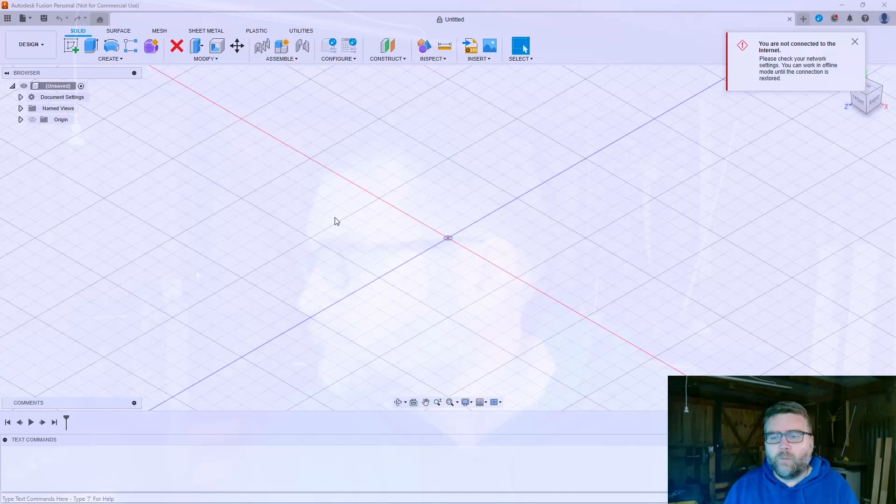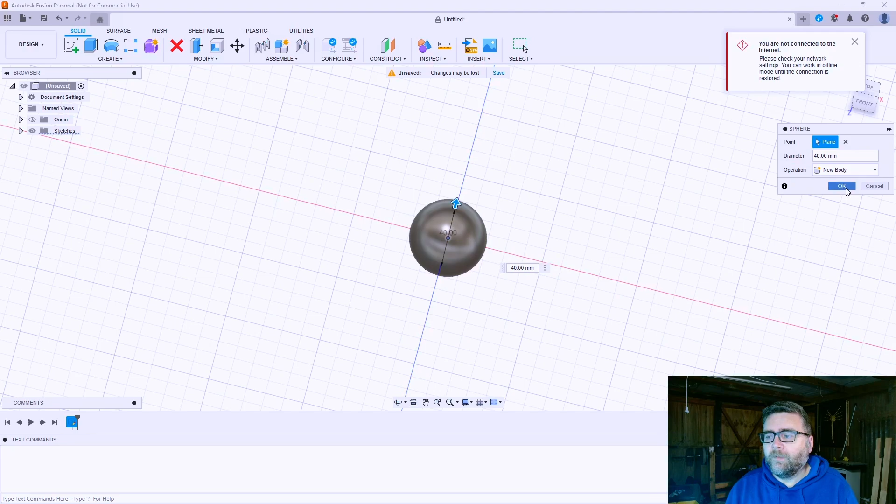So we're here in Fusion, and with this laser cutter thing, I think everything is going to start as a sketch. There's our 3D world if you've never seen Fusion before, sort of looking down from the top of our 3D object. If I was going to grab a sphere or something and plonk it here, drew it out, there it is, looking from the top and around and everywhere.

But because we're doing an SVG, we're just going to use a sketch object, so I'll delete this one. I'm going to click on sketch, and then the plane we want to go on, doesn't really matter for us, but we'll just choose this one here. What I'm going to do, you would have seen it in the thumbnail, is create a name stand. So when I'm in here, if I type S, it gives me shortcuts.

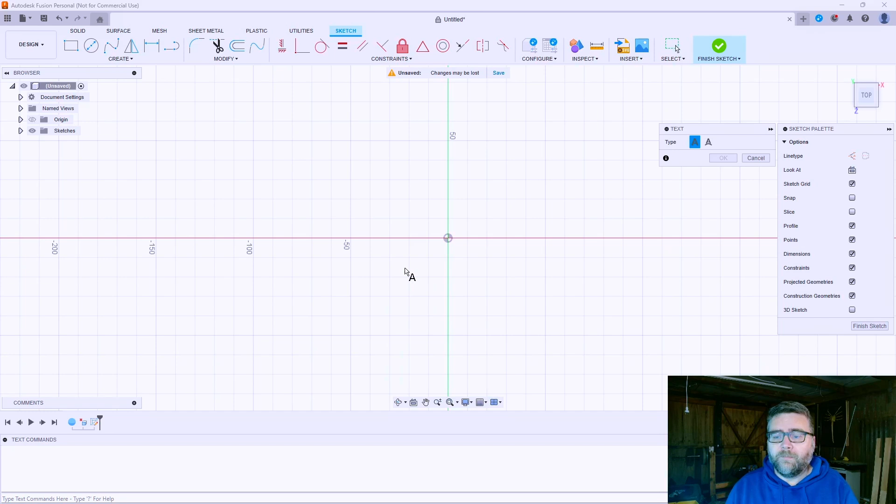So I want to put in text, type in text, draw what I want the text to be, and just type in my text. This will be a name, I'll just call it Cade for now. And that font's pretty boring. The other thing is, if I were to burn this off now, I'd have 4 different things.

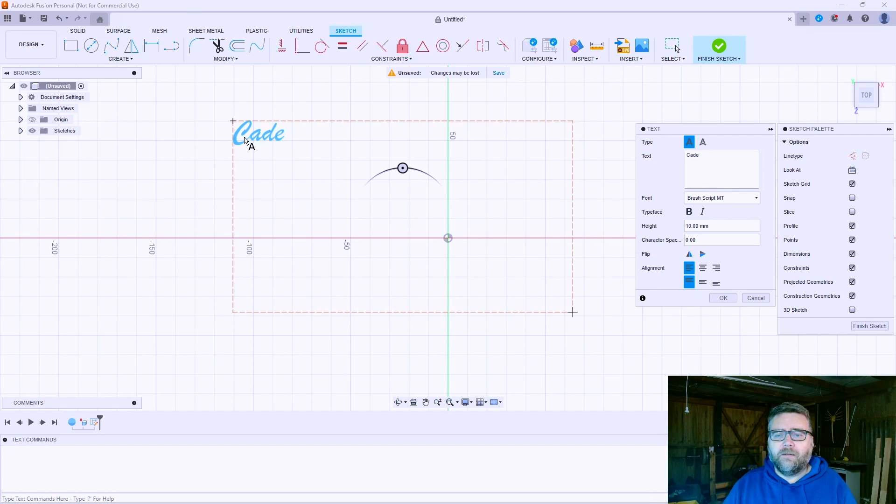I want them all joined together, so I want a font which is like a script font. It looks cool, when we look at it we can see it's all joined together. There, it's very thin joined there, but we'll see what we can do with it. We'll stick with that, it's all joined together in one solid piece, and we just click OK, and it creates the text.

So the text at the moment we can't do anything with, so we just have to click on explode text, and it creates the outline. So this is what it's going to burn when we put it to the burner.

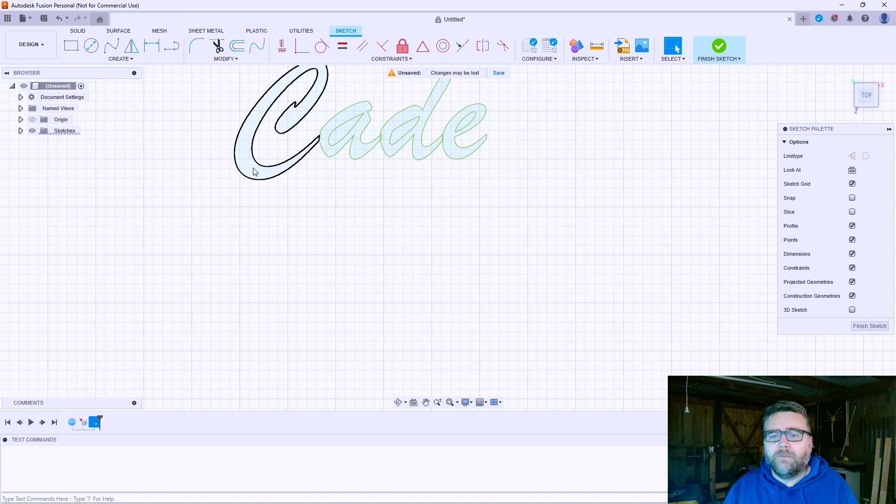We need a little stand down the bottom here for it to put into the stand itself. So what I'll do is click on each of these objects now, and when I push E for extrude, I can extrude it out. Now my wood, I know, is 4.75 millimeters thick, so I really want to make this the same size so I can see what it's going to look like. So I put in 4.75.

And there's our word. So it's going to be super tiny, I don't really measure it.

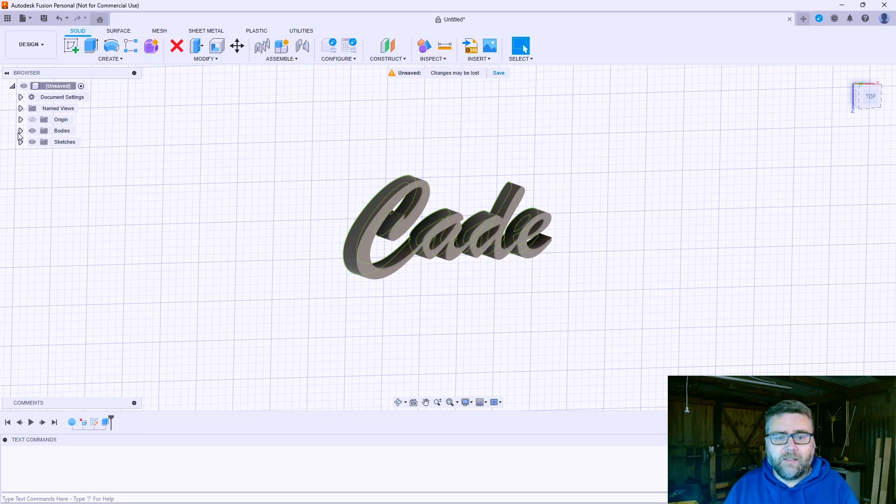If I click on the body again, and click on S and scale, I can scale it either all at the same time, or just in a couple of directions. So we want to scale it this way. Nope, that's the one way we don't want to do it, so we'll leave it as 1, take this up to 2, this up to 2.

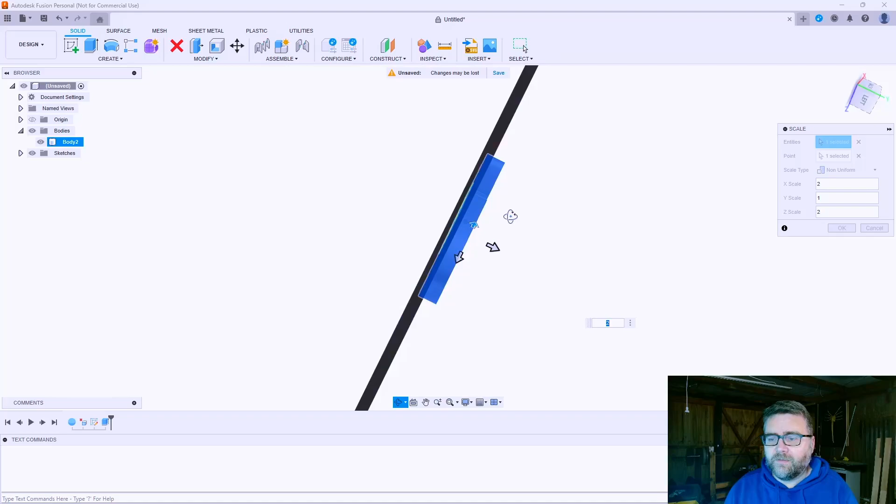So it's kind of twice the size now, still want it a bit bigger I think. It's starting to look about right. What do we measure it at? 80 millimeters. Bigger than I hoped, but it doesn't matter, we'll just do it anyway.

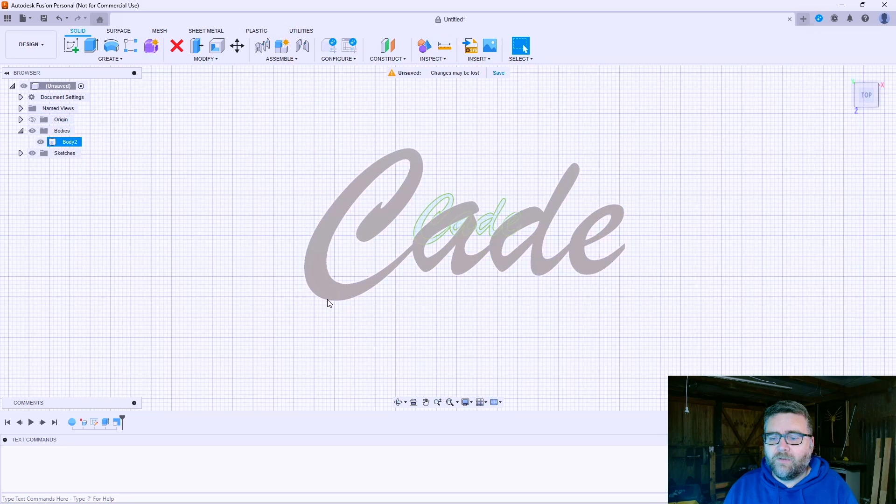Down the bottom of this C, we're going to have it go into a base for it to hold on to. So I'll just be lazy here and just create a box, and we'll make it 5 millimeters wide. It doesn't really matter how wide we make it because we're cutting out the shape.

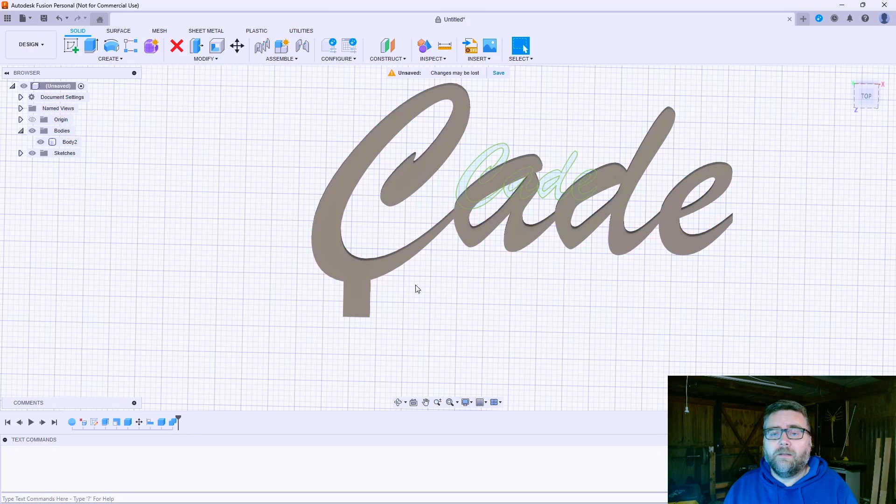But we've got 2 different bodies here. So if we were to try and export this now, it would be 2 separate objects, which isn't much use to us. So we're just going to join them together. We go Modify, Combine, and with the option, that's our target body, and our tool body is what we're going to add to it. And there we go, that's our little sign.

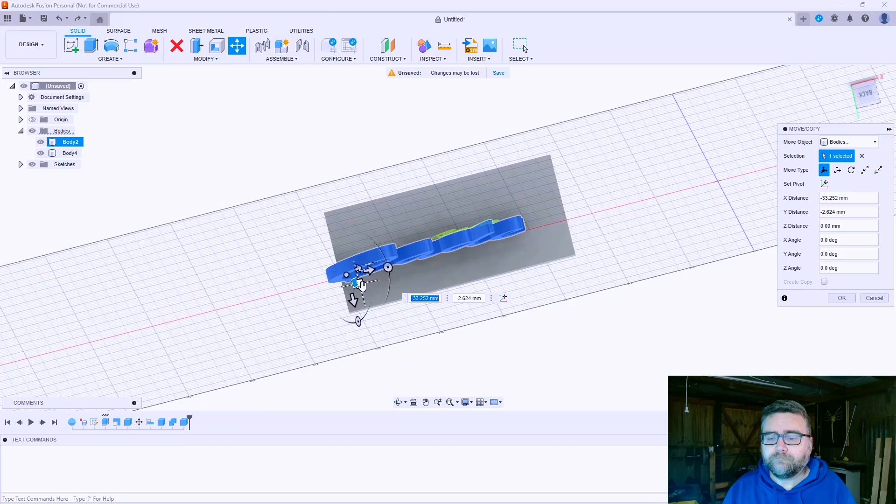So we're just going to create the base. We go up and create a box, put it on the bottom, so we'll just align it this way. Now we want to just drop our text down into our little base here, and just grab the tool again and just move it down to where I want it to be. I mean, you can go and measure it all out if you like, but we're just knocking something up today.

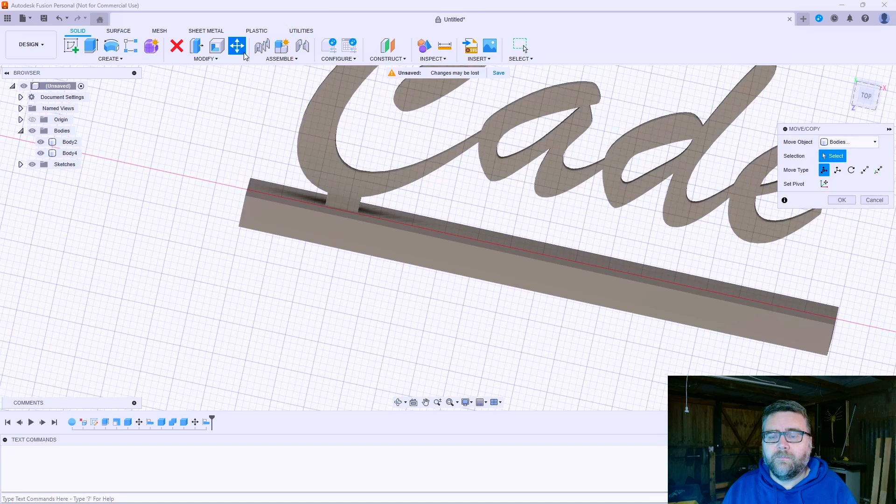It looks pretty good. And we do want this base bit to align with here. Make sure it's a bit smaller. Might fit it down like that. So it looks pretty good. I'm not sure how long this is going to last without a little bit holding it on, but it seems pretty tough wood. Just to make it a bit nicer, we'll just round off these corners.

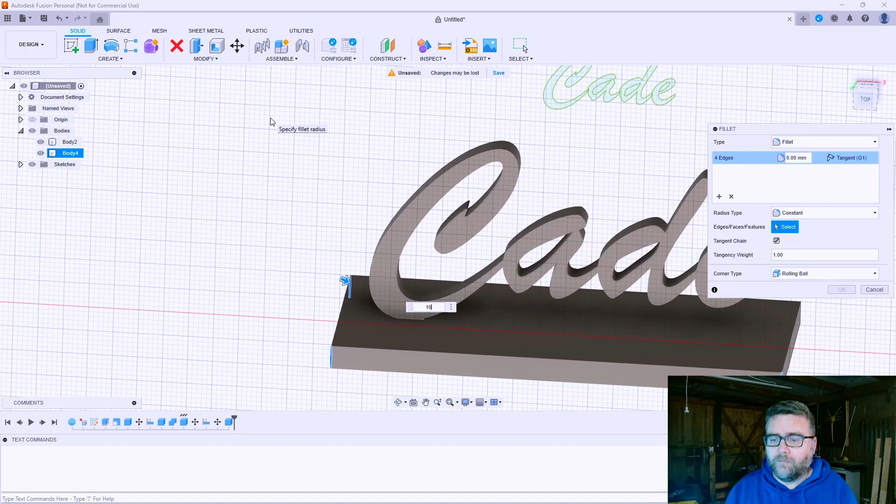Fillet it, make it about 10 mil. Looks alright. So we also need a hole in our base. We'll just use this combine tool again so we get it in the exact position how we want it. And we want to keep the tool, so if I delete this now, it's going to delete the decal as well.

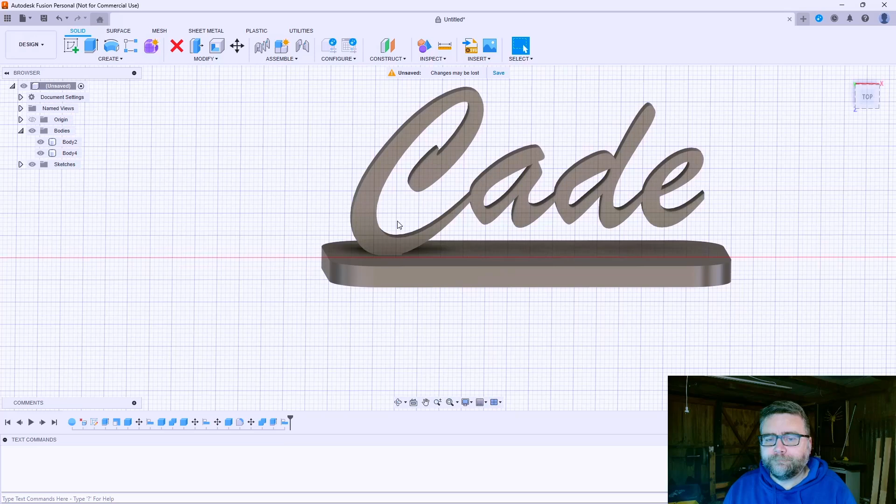So if I just hide this for now, we've got our hole. It doesn't go all the way through, so I can just grab on that, extrude, cut out the bottom. So there's our little sign, and we can go through and change the appearance of it so it looks more like what I'm making the object out of.

So the end result should look pretty similar to that. It's not quite centre, but we're not too worried about that. Now if we're going to print this to a 3D printer, we'll just export it now as an STL and print it. That would be full of supports because the text is floating in midair, right?

But we're going to laser cut it, so we need to create SVGs, which is what our laser cutter understands. Or we could save it as a bitmap, but it'll be horrible as well, it probably wouldn't really work too good. So I don't think you can save this as an SVG in Fusion. We'll just have a look.

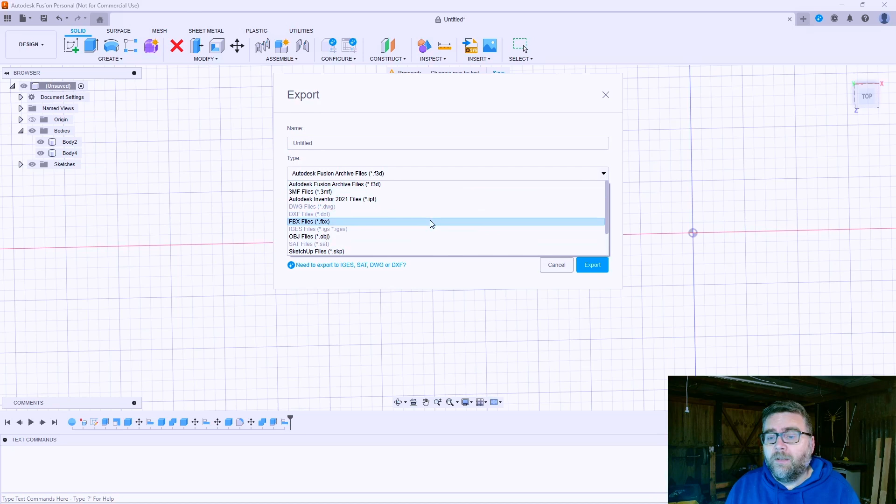Now, if I've only got DXF there, and you've got to pay for it. And this is the free version because I don't make any money out of this. So what we'll do is there's a plugin which you can get for free from the plugins store on this software. It's called Export Origin.

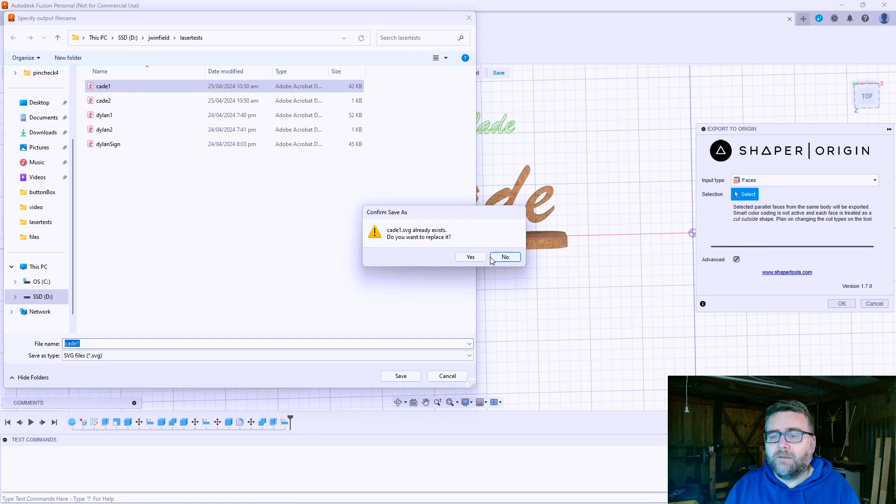And what this does is you click on a face and it exports that face as an SVG. So I click on this one here and I go OK. I can just save it locally. And I want to do the same for the base.

So now we've got these SVGs, which are just kind of outlines of all this. We want to go into Inkscape and prepare the files for sending down to the laser cutter. Inkscape is a free open source vector editor, so we can go and open those files up. And as you can see, it's completely full with black, which is not what we want at all because it'll give us ashes.

So we want to click on that, and choose this fill and stroke tool up here, and we want to remove the fill. Now we've got nothing, but we want to put the stroke in and change it to black. And it's got this big black border in there, and that's because of the stroke style. So we change the stroke style, it says it's 10mm, we only want that 1mm.

We'll change this to the same. It doesn't really matter, I don't think, for this. It'll just follow or whatever. So that's our base already and prepared for cutting.

And here's our text as well. So we've got to go through and do the same thing. We don't want any fill. If I send it down now, it'll just print the Cade part, not the entire thing. We want it to print both things at the same time. You can print them one at a time if you want, but this makes sense to print them both at once.

So down the bottom here we've just got a little page icon, and when I click on these squares, I'm going to extend out the size of the page. And I jump back into my other screen. Let's do a Control A and a copy. Go back into Cade, Control V, and I want to rotate that.

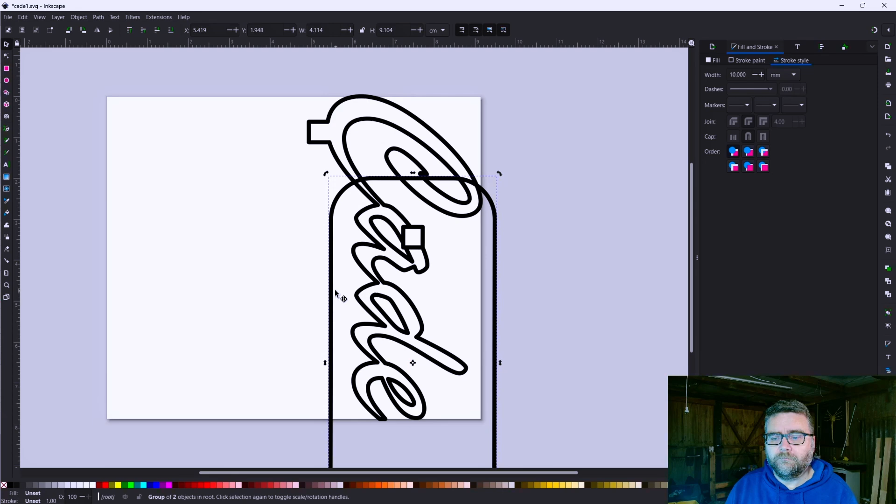We just need to make our page a little bit bigger. So when I send this down to my laser cutter now, down here on the bottom left is going to be the home point, or 00, for my laser cutter. If I had this right at the top of the page, it'd be this big white area, so the laser cutter would move all the way up there, but we don't want to do that, so we're just going to leave it down here on the bottom so it doesn't travel all the way across and make a mess. And then I just save this as Cade sign.

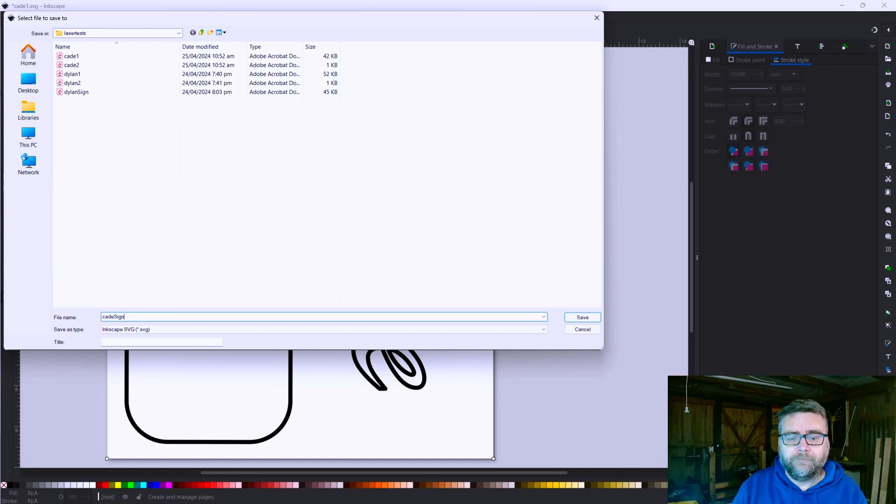Okay, so we created our sign in Fusion 360. We exported that as SVG. We'll put this into Inkscape. We probably could have just opened these SVGs, each individual one, straight into the burning software, but I just like to tile it up like this so it does it all at once. You could probably avoid Inkscape altogether if you want, but it's free and it's probably good to learn using that software, right? So once we've got our file, I'm going to use Laser GRBL to print it out.

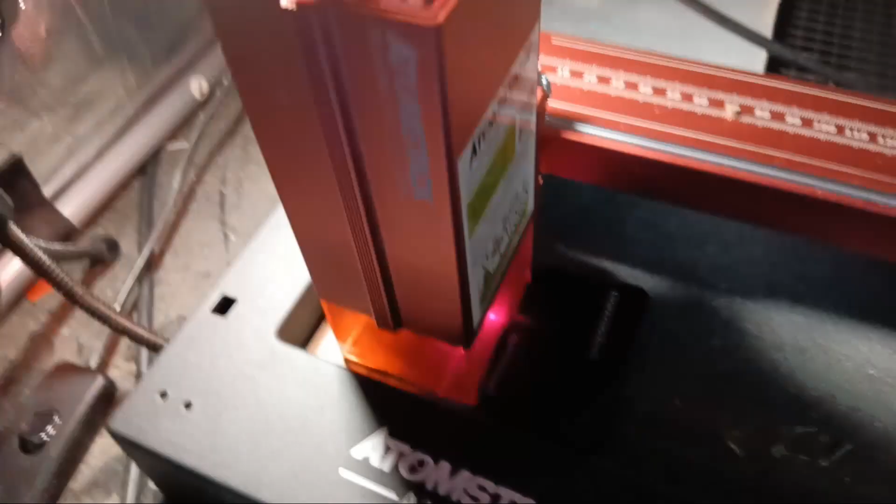So I've got this old bit of wood I've just got kicking around the workshop. I think I just used the spare panel to be honest, just a scrap piece of wood. I put it into the laser and I use this little jig which came with the machine, which sets the right focus height for engraving or cutting. I want to cut, so I'll just drop it down right to the bottom.

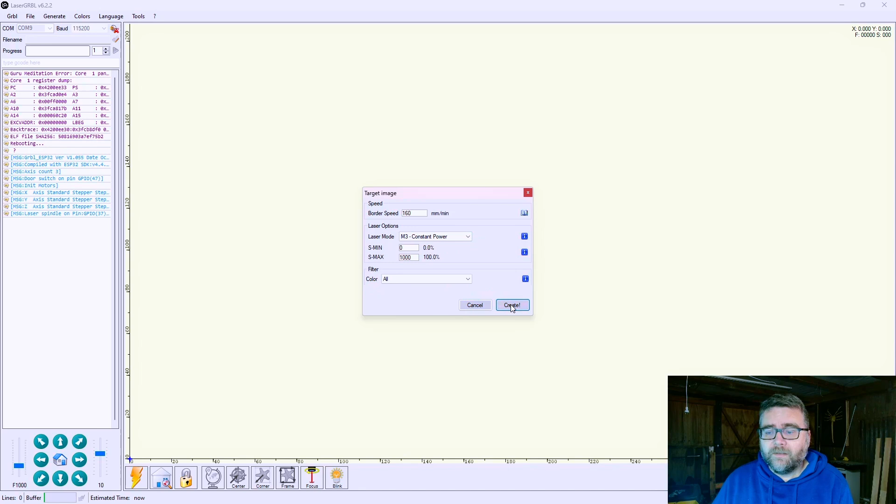To burn my file, go into Laser GRBL, File, Open File. Just grab the file that I've been working with and open it, and in here it has the settings. We have S-Max, which is the max power, and over here it's got like a little book, and for me it's quite good because it's got a very similar model with a catalogue of materials. So I'm using MDF, 100% power, 160mm a minute. The thickness is close enough to 5mm, and click on apply and create, and it's got my file there, and it's going to burn this down based on the outline I've created.

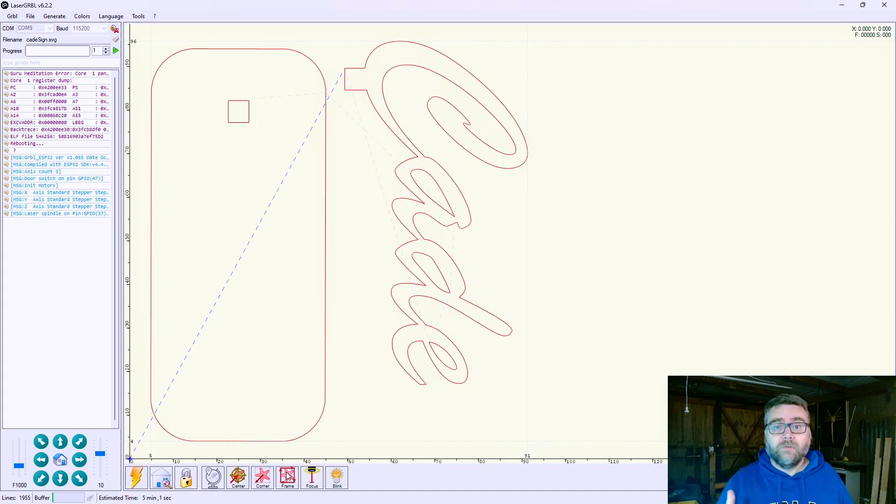So I put my material in, and just to make life a bit easier, to make sure I've got the right amount of material, there's a frame button here, and when I click on it, it'll just go around the border of where it's going to burn. So now if I've gone out of the material I've got, it's too small, so I'll just click on that now and see what happens. So it's all framed out now, and we can see it's not going to go outside the edges of the bit of wood I've got there.

So next step we've got to do is just fire it off for printing, and that's just this play button up in the top corner here. So when I click on play, it'll start burning. Ideally we want to keep an eye on what's going on. We don't want to leave this machine to its own devices. It's basically a fire making machine, and we don't want to look at it directly either because the laser is going to hurt your eyes.

So all I've done is I've hooked up - I've got the 3D printer running off Klipper, and it's got a webcam, so I just swap the webcam between the 3D printer and the laser engraver for whatever I'm doing at the time. So here's a quick preview of what's going on, and that way I can look at the printer wherever I am in the world and make sure it's not catching the shed on fire.

So let's jump in and click on play and let it do its thing. I'm going to turn the fan on because it stinks.

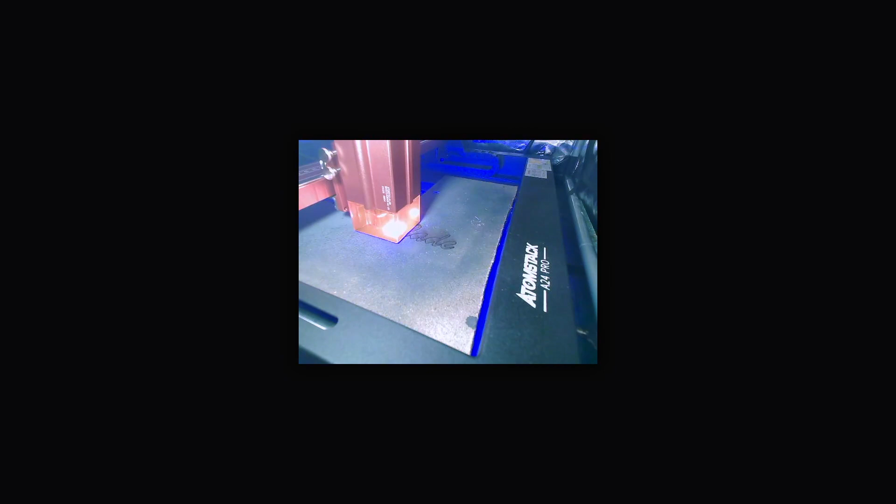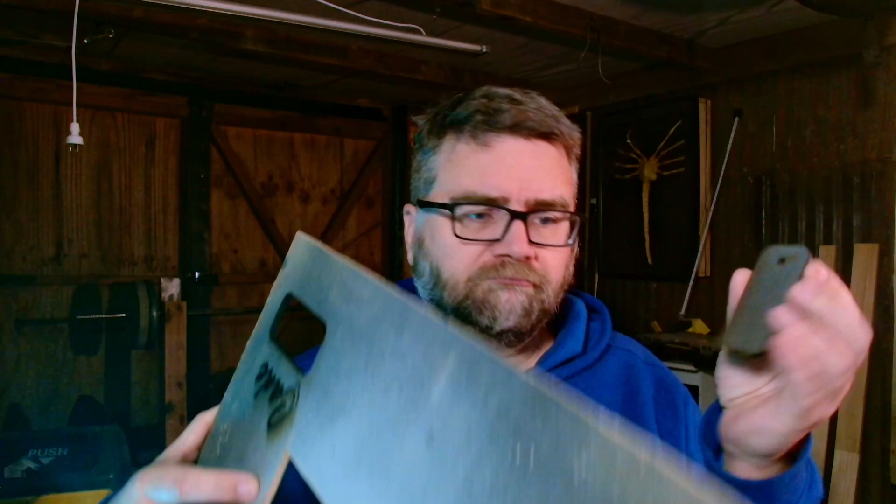So it's pretty much falling out. I can't imagine this lasting too long with kids. Oh, here we go. Looks pretty cool.